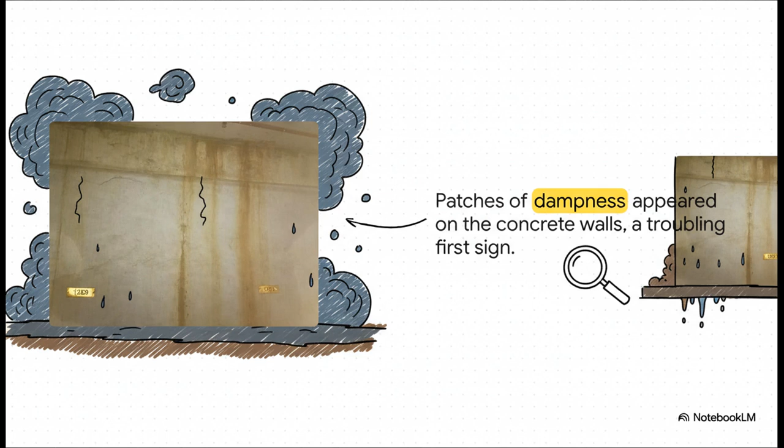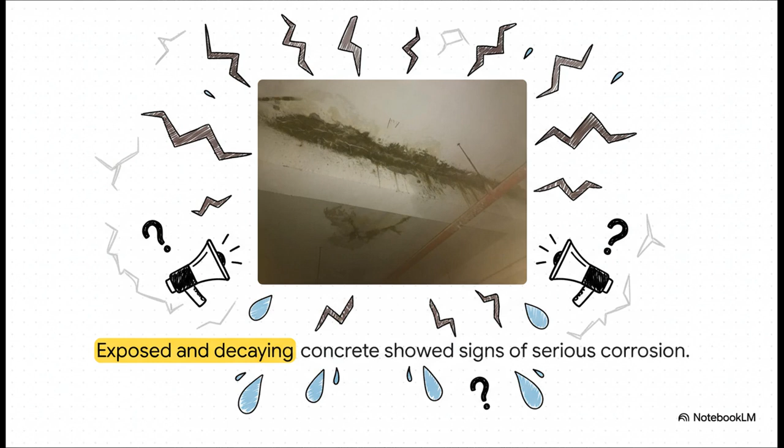So when your building is sending out an SOS, who you gonna call? You call in the experts, of course — the structural detectives who can follow the clues and figure out what's really going on. So the society brought in their own team of investigators: Technity engineers and consultants. Their mission: to conduct a full structural audit and get to the bottom of what was happening beneath the surface.

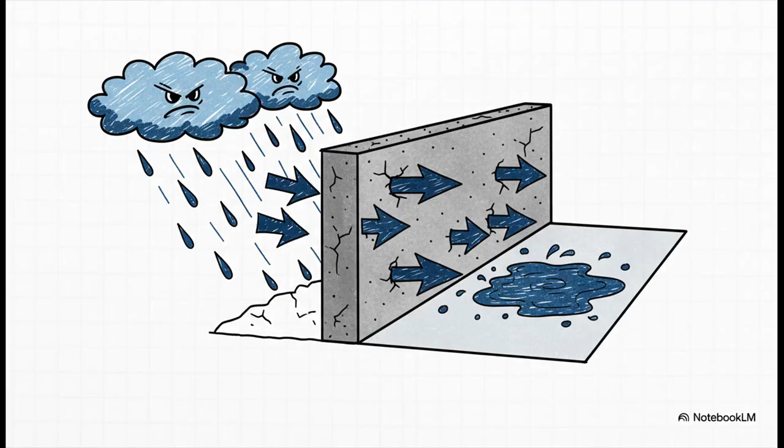And you know what, that visual inspection turned up a mountain of evidence. So let's follow the trail of clues they found in the building's underworld, the basement. The first major finding was crystal clear: the problem wasn't starting inside the basement. Nope, the enemy was attacking from the outside.

Water was infiltrating the whole structure, and this just shows you the connection perfectly. On the left, you see that external crack in the retaining wall we saw a minute ago. And on the right, that's the direct result inside the basement: water stains and active leaks. It's a straight-up pathway for water to just march right in.

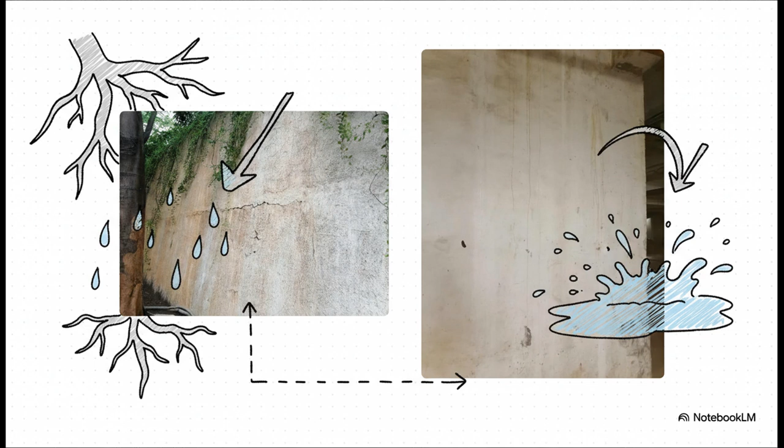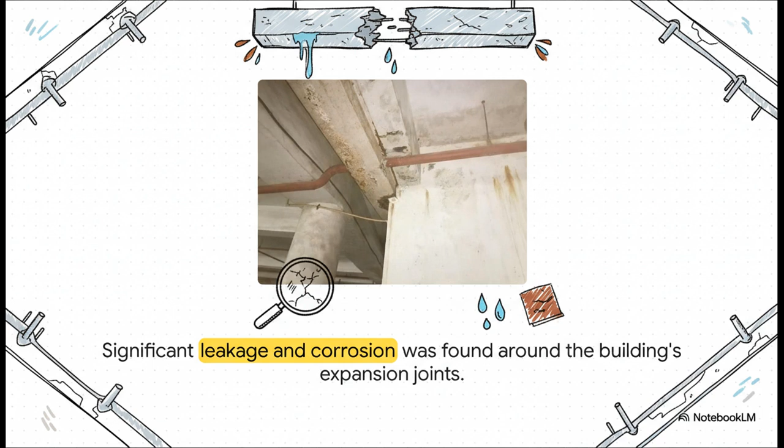But the detectives found another point of entry. The expansion joints, which are designed to let a building move and flex safely, had become serious weak spots. You can see right here there's significant leakage and corrosion all along those joints. Another huge vulnerability.

So we know what is happening: water's getting in. But the bigger question is, why? What is this water actually doing to the very bones of the building? To get that, we need to look at some invisible enemies at play here. See, this isn't just a story about water, it's a story about chemistry — a slow, silent chemical reaction that's attacking the building from the inside out.

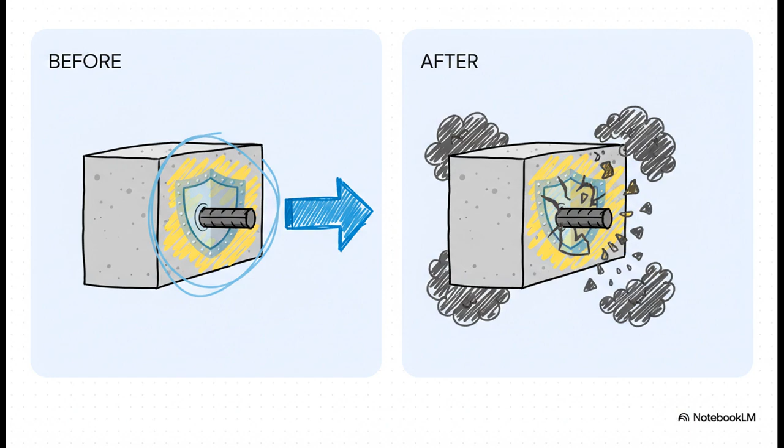Okay, think of it like this. Healthy concrete has a really high alkalinity, and that acts like a bodyguard — it forms a protective layer around the steel reinforcement bars inside. But its mortal enemy, carbon dioxide from the air, sneaks in and totally neutralizes that bodyguard, leaving the steel completely exposed and defenseless. This whole process is called carbonation. This is the key chemical reaction that turns a strong, durable structure into a really vulnerable one. CO2 gets in, lowers the pH, and strips away the steel's natural defense mechanism.

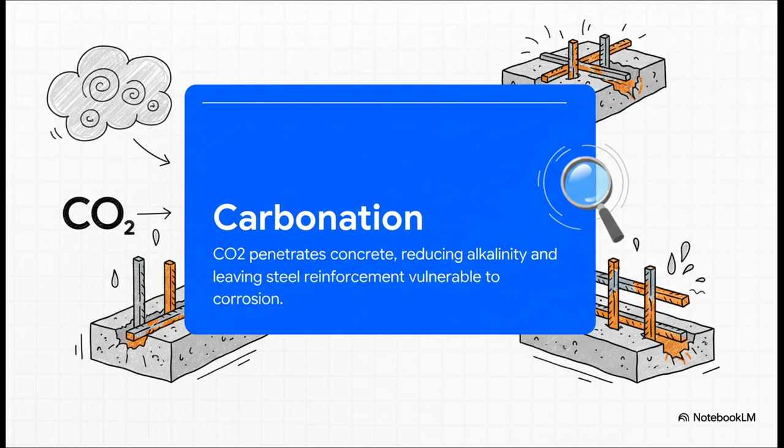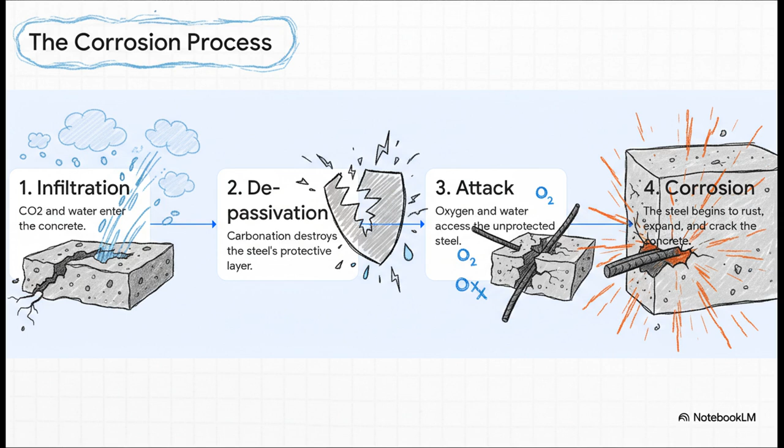So this is how it all goes down — basically a four-step attack. First, CO2 and water seep into the concrete's pores. Step two is depassivation, the carbonation process completely knocking out that protective layer around the steel. Then in step three, oxygen and water have a wide-open invitation to attack the now defenseless steel. And finally, step four: corrosion. The steel starts to rust, it expands, and it literally cracks the concrete from the inside out — a total disaster.

And as the engineers themselves point out in their report, and this is a direct quote, it's not even constant wetness that's the biggest issue — it's the cycle of wetting and drying. That intermittent exposure creates the absolute perfect storm for this kind of corrosion to really take hold and spread like wildfire.

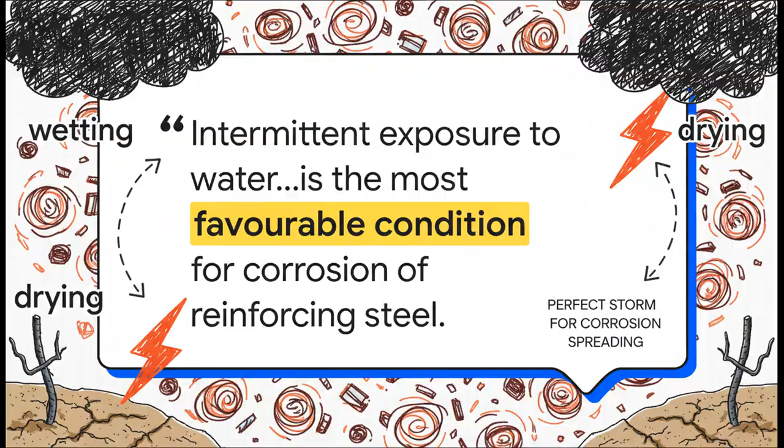So with the investigation done and the culprits identified, the report was delivered. But hey, a report is just paper, right? The next step needed action, and it needed it from the people who actually called this building home.

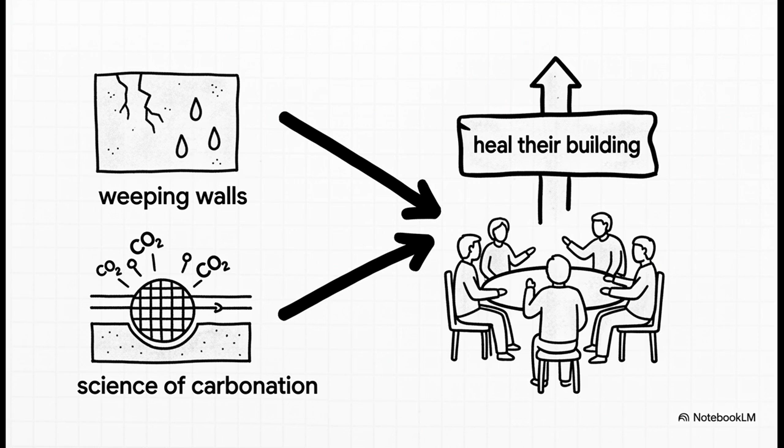And that's really the final crucial link in our story. The weeping walls, the cracks, the science of carbonation — it all leads directly to this single moment, where the community has to come together and choose a path forward to heal their building. So the case of the weeping walls really shows us that our buildings are always communicating with us. They're telling us stories of stress and age and attack from the environment. The only question is, are we paying close enough attention to hear what they're trying to say?